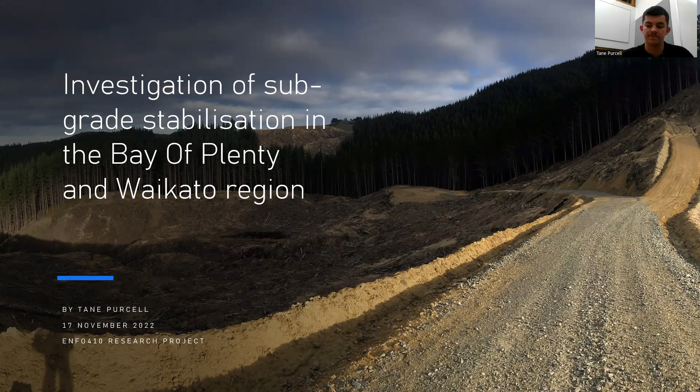So a quick overview of this project. I was lucky enough to gain this project through Rayonier Matariki Forest, where I worked with their Tauranga-based office. This study was conducted as it is believed that subgrade strength often leads to an effective road, and the subgrade here being the natural soil layer pictured in this picture here on the right.

Now, chemical stabilisation is the option we've chosen to use for this project, this being through lime, polycom, and lime and cement. Now, why stabilise? So stabilisation improves the soil properties. It reduces the quantity or quality of aggregate used. It reduces the maintenance, increases the strength and rigidity, and lowers the overall roading cost.

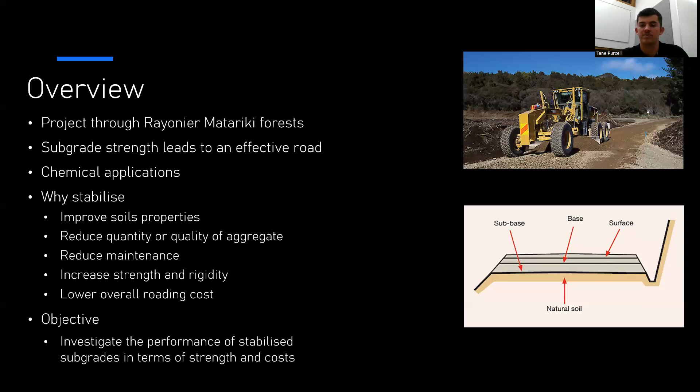Now, the objective of the study was to investigate the performance of stabilised subgrades, this in terms of strength and costs. So the stabilisers trialed, these being polycom, lime, and the lime and cement mixture. So polycom is a granular polymer-based product that binds soil particles together, and this comes in a 2 kg stabiliser, and it stabilises 50 metres cubed, and the 2 kgs comes in a milk-shaped container.

With the lime, so lime stabilisation dates back thousands of years, and the lime increases the strength, the workability of the soil, and it creates a relatively impermeable layer. And for this study, the lime was mixed in at a rate of 4%.

And then the lime and cement mixture, so the cement was added as it increases the stiffness and strength, but has a low impact on the clay soils, is more likely to crack and is less workable. And these factors are often picked up by the lime. So the lime was mixed in at a rate of 4%, and the cement was mixed in at 3%.

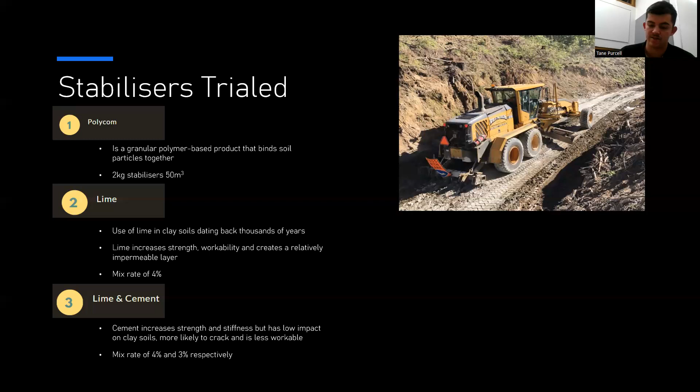So to the testing process, so as I said before, there's two forests. There's Omataroa in the eastern Bay of Plenty and Waerenga in the Waikato region. Sites were selected so they had similar slope, soil properties, and water drainage. And they were set up, as you can see here, with site 1, site 2, and site 3 being treated, and then the buffer zone with no treatment on them.

Now to the soil classification. This is a big factor influencing the performance of the stabilisers. In Omataroa, it was classified as a yellow/brown pumice or a sandy loam, with high organic content still on the road. In Waerenga, it was classified as a clay loam with grey and reddish/orange clays present.

Another factor influencing the performance is the rainfall. As you can see here, in June and July, for both forests, the rainfall was a lot larger than historic averages, especially in Omataroa, with June and July being double and triple the historic average.

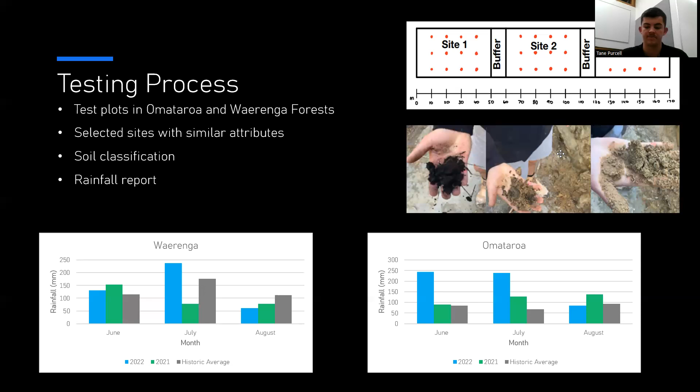Now to the treatment process. So the first step was obviously to mark out the treatment site, and then the second step here, which is to rip. So a grader was used for this, with the rippers set to about 150 mils depth, and it was ripped 6 to 8 times just to make sure the soil was well broken up.

Next step here was to spread the stabiliser, with the polycom being spread with an electric hand spreader. The lime, as you can see here, was spread with the excavator, and then the cement came in 40 kilo bags, which was hand spread, or the bags were dumped every 1 to 1.5 metres along the 50 metre section.

And with the powdered, especially the lime and the lime and cement, a grader had to go through and re-rip, just to make sure that the treatment had been spread correctly. And in tandem with this, the water truck was used. So we would rip and then water, rip, water, and this was repeated 4 to 5 times. The final step included shaping the road with the grader and then rolling it.

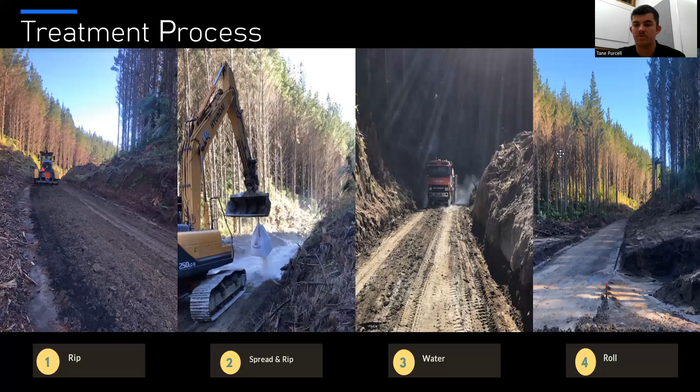So to the results, so Omataroa, the Polycom increased CBR from 15 to 21, showing a good increase in the soil and environment. However, it did have lower sunshine compared to all the other sites. For the lime, the CBR actually decreased from 23 to 14.

I believe this is because of the low clay content in the soil, and also the high organic content, which can be seen in the first image here below, which is about a 20 metre section of really high organic content. And then also the poor compaction after treatment, which you can see in the second photo here through the middle, where 4 tests were done, and they all found really low compaction. So in contrast, the pre-test had good compaction and post didn't.

So for the third one here, lime and cement. So already starting off with quite a high base, CBR of 30. It did show improvement, and this is due to, I believe, the high sunshine hours and the higher amounts of gravel and sand present, allowing the cement to form strong bonds.

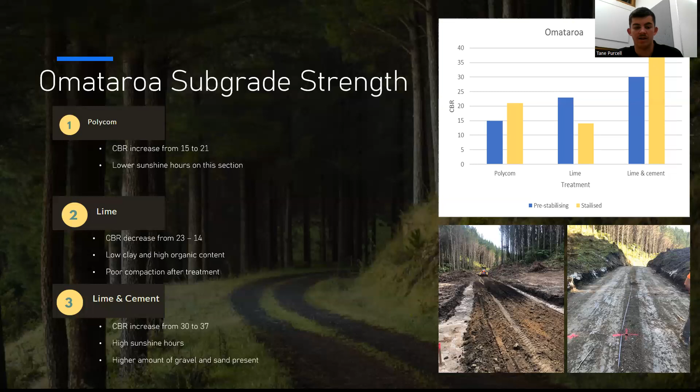The Waerenga results, so the Polycom showed a huge increase here, increasing the CBR from 9 to 28, and this is probably due to the more sunshine hours compared to Omataroa and possibly the high clay content. For both the other treatments, they showed no improvement. They stayed at CBR of 6 and 8, which is really surprising as the pre-stabilisation tests were done on saturated soil.

As you can see in this first photo here with the water actually in the water table, and then the stabilised tests were done on baked soil, which is quite surprising. There's no difference, but you don't know what happened there. But I believe the cement didn't work well in this soil just because of the low sand and gravel content.

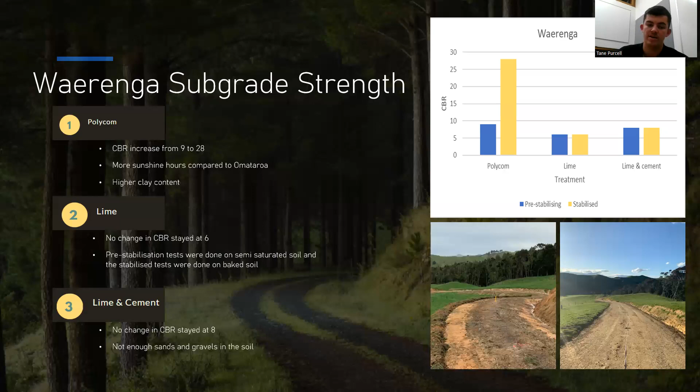So to the second part of the objective, the costing. So for the costing, the aggregate, transport, machine hire, and the stabiliser costs were all included or excluded depending on which treatment was used. The aggregate depth was based on a CBR over 30, and this was using the Austroads graph. And obviously with the graph, design traffic values were needed, and these were different due to the different road classifications given to the site, with Omataroa being a stub road and Waerenga being a main road.

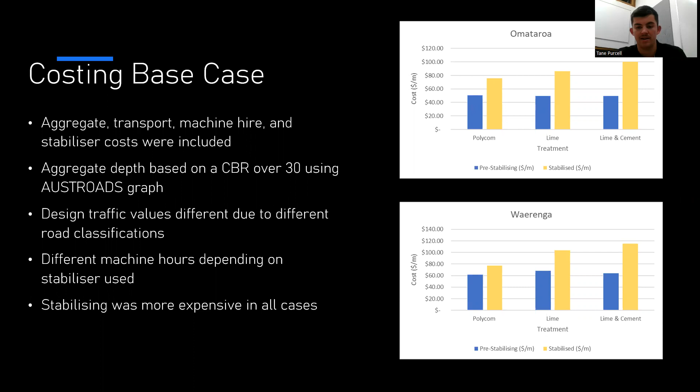And then different machine hours depending on stabilisers used. So obviously the excavator wasn't used in the Polycom treatment, but it was used in the lime, so it was included in the lime calculation. And as you can see in all these graphs here, the stabiliser was more expensive in all cases, with the Polycom and Waerenga being the closest.

And with it being the closest, I thought break-even analysis would be a good idea. So it was based on these results, and for that it showed a saving in aggregate of 39%. And when this was run for the different depths, it was found that the Polycom was going to be cheaper after 420 mils of aggregate required. And also, these are based on the values given from Waerenga, but if the aggregate costs were higher, I added $15 to the price, and it dropped massively. So the depth was only required to be 300 before the Polycom was cheaper.

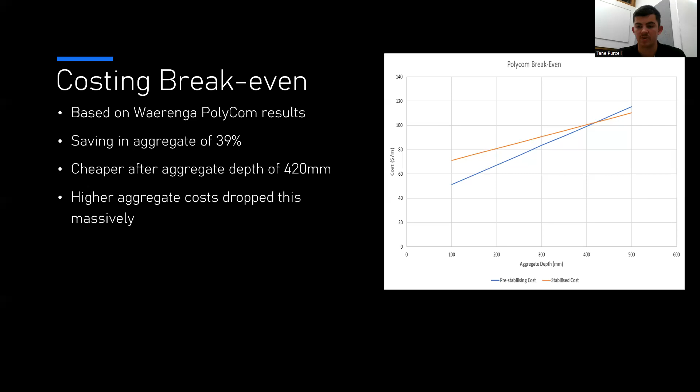So in summary, the Polycom worked better. It worked well on both sites, but worked better in a clay soil with more sunlight, and was easy to apply, but obviously still had soft spots. And if I was going to do it again with Polycom, I would trial different mixture rates. In this trial, we mixed it at 80% of what was required, so it was a bit less than was recommended by the supplier. But you could go even lower because this showed good results in this trial.

And the lime worked poorly in both forests. I don't know why, but this could be due to the application process, the lime concentration, or the weather factors, having a large amount of rain over the curing times. And if I was going to do it next, I'd use a granular or hydrated lime.

And the lime and cement worked well in the Omataroa forest that had high granular soils present. It also had really high CBRs of upwards of 60. Then also had areas that still only had a CBR of 6. So this obviously brings the average to about the middle.